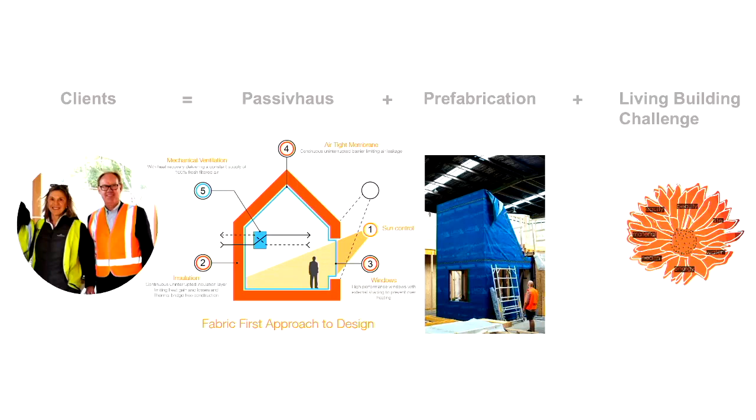Like all projects, we start with the clients, and in this case, Kate and David came to us with a really passionate brief about sustainability. In fact, David's background as an engineer meant that he came to us saying that he wanted to build a house with Passivhaus and Living Building Challenge principles, which is unusual, and to also explore the idea of prefabrication. So David's engineering background, I think, fueled that fascination with the construction process.

So the site is in Toorak, and it's actually fairly well aligned to get really nice north orientation onto the spaces, and it's on a quiet cul-de-sac. But it's not your typical off-grid site, which living building challenge required, and so to be able to achieve this self-reliability on electricity, the Passivhaus really created this very efficient thermal envelope that was produced in our factory, and also the project was collecting its own rainwater, treating all its black and grey water, which is a really tricky thing to do on a suburban site.

But in addition to those things, there was also the need for pretty significant areas of food production and to weave in some ideas about biophilic design into the site. The key concept of the house really started around the idea of creating a courtyard house, and to then open up the northern edge, kind of eroding that to bring in light and ventilation into the core of the house.

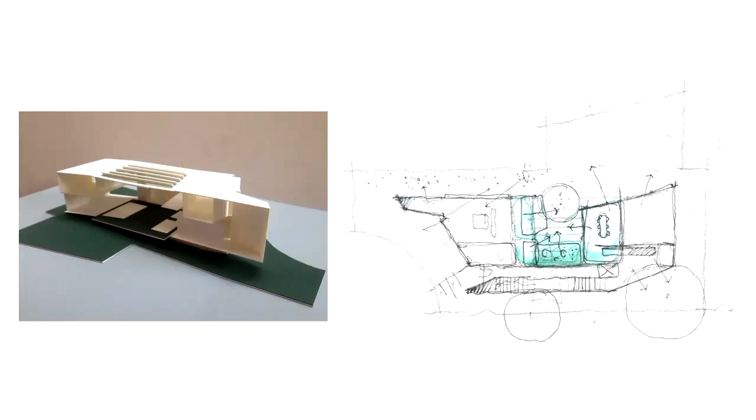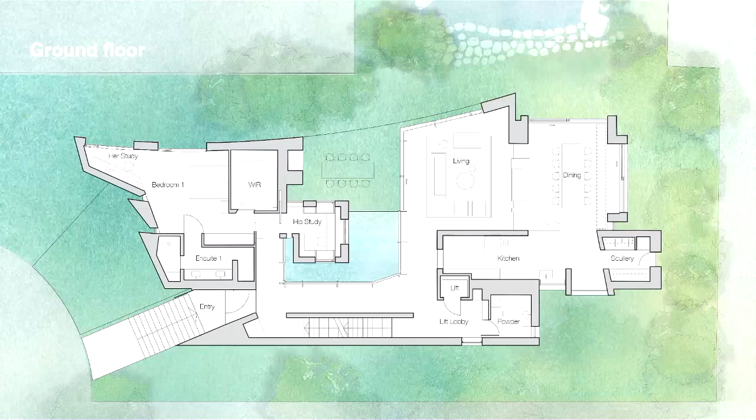The ground floor plan here, you can see that the living and dining space are set further to the back of the site, where it starts to be a little wider, just given the shape of the site, and that allows the living and dining spaces to push into the landscape further. Along the street, the bedroom is shielded from the street, which is facing west, but it does have views into a garden edge through there. And at the centre, the courtyard has a small study space floating within that, and along the southern edge is circulation and entry point.

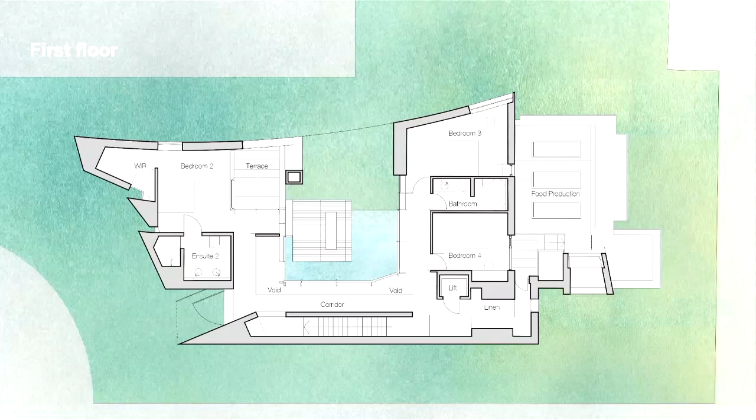At the upper level, at first floor, there's a series of bedrooms which are set around the courtyard with a layer of circulation and void around the courtyard, as well as terrace and food production spaces as well. You'll notice also that there's a slight curve along the plan to the north, which ties together the two wings of the house, if you like. At basement level, there's a garage, there's also a music studio and a cellar, and also a small plant space for the mechanical plant that's required.

One of the key decisions that we needed to make was around materials for the house, and given the Living Building Challenge, it really focuses on local materials and low embodied carbon, and that's something we would like to do anyway, but of course this is a really strict requirement of LBC. And our thoughts did turn to local stone and Mount Gambier limestone, which was used in the Heide House by McGlashan and Everist.

So we talked to the client about that, and the softness of the limestone allows it to be cut easily out of the quarry and transported to site with little energy expenditure. And also, over time, it develops a patina, which is really interesting, and they were excited by that idea. The patterning of the blockwork, the bonding and the corner detailing became a really interesting way of developing a language for the house as well.

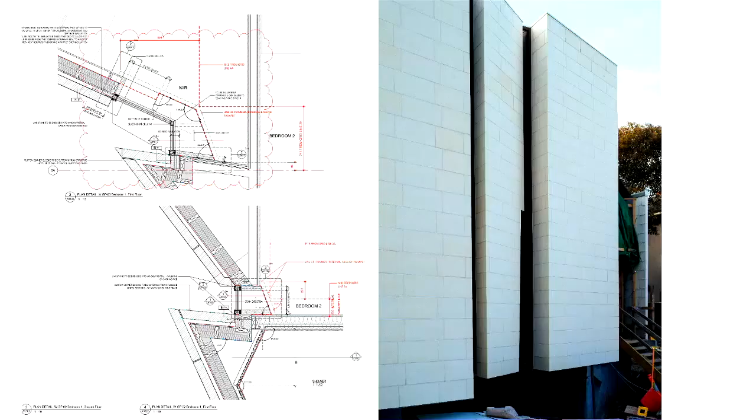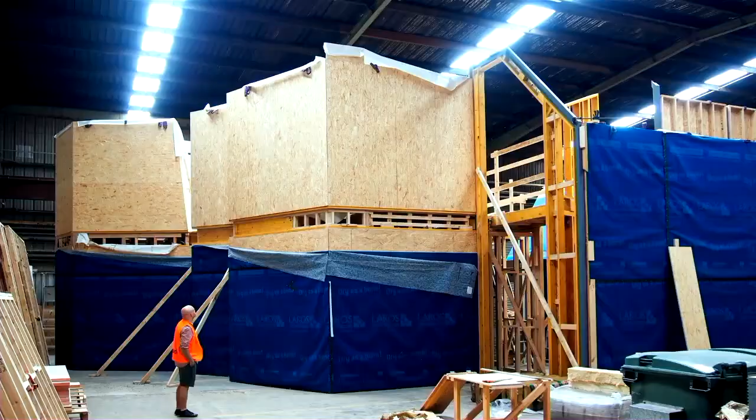Yeah, so behind this quite precisely laid out limestone layer, there's this high-performing thermal envelope, which you can see in the diagram on the left. And that was built in a factory in Sunshine at the same time as the slab and other construction aspects were happening on site, with obviously all those great benefits that prefabrication has.

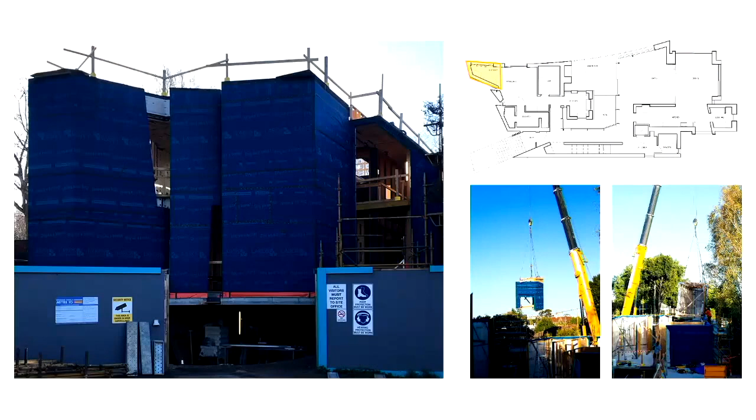And once those modules, some of them two-dimensional, where possible three-dimensional, were completed, they were systematically brought to site and placed on the recently finished concrete slab.

The appearance from the street is very much about this limestone skin, and the fact that almost in a sculpting way, the windows on the west, which is where the bedrooms are on both levels, have been sculpted away to create these incisions, which just show enough signs of inhabitation from the street at night particularly, but offer great privacy and sun control.

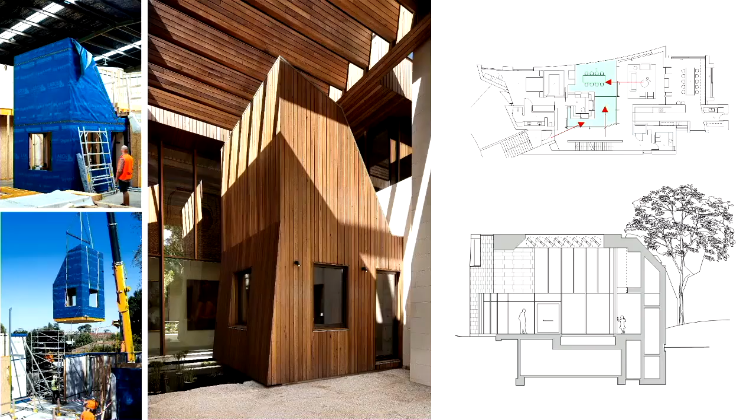And then within that courtyard space is this small footprint study, which is lined with bookshelves. It has a kind of a feeling of a library within it. It's quite tall and draws light in from above. And you can see on the left side of that slide the prefabrication of that part of the building in the factory, and then being kind of brought to site and craned into position.

Thank you. Light coming in from above into that courtyard space is moderated by some adjustable timber louvers, which are adjusted depending on the season.

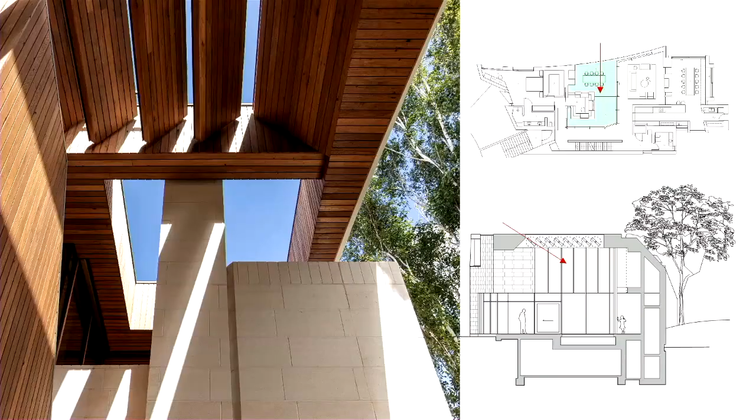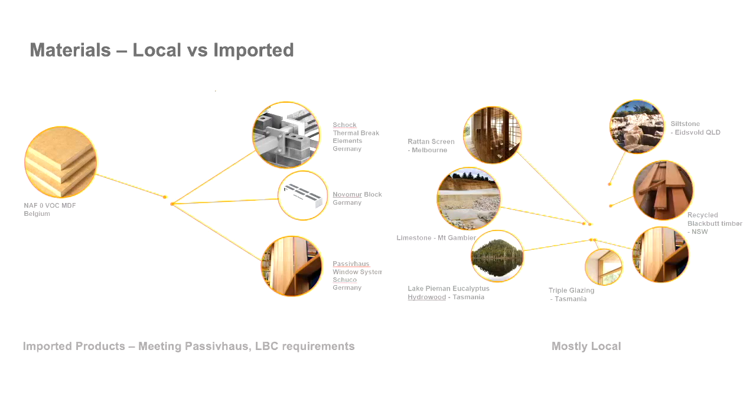And so because of Living Building Challenge, there was a very strong focus on local materials. So on the left, those materials that we simply could not get locally, like those for passive house windows or thermal breaks and the like. But generally, the materials are local, so Gambier limestone on the floor, it's a Queensland siltstone, blackbutt, as Stefan mentioned, and then internally a eucalyptus from Tasmania predominates.

So very much about two materials as you go into the house, but what's really interesting is that beyond this really calm appearance, there's a lot of technical aspects that are happening below and above the finished layers.

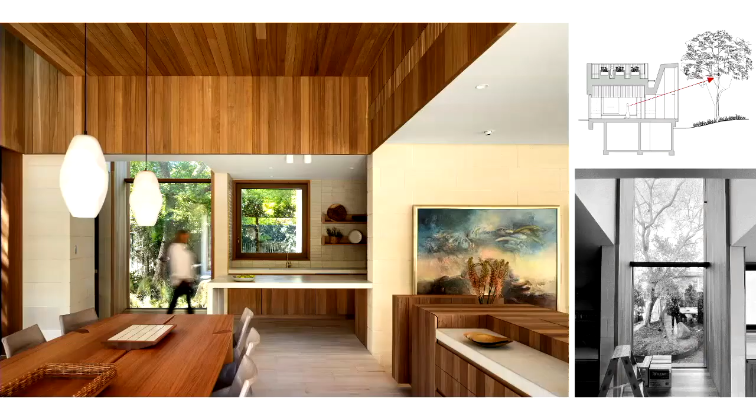Looking back the other way, the focus, which is generally on the north side, changes to this view towards these very significant Chinese elms. So there's a very oversized window that really picks up the proportions of the tree. So natural materials, generally very much about being local, being naturally sourced, and also being made by someone. So concrete and rattan screens show evidence of someone's hand.

So the house, as Diego described, is almost inscrutable from the street, but it opens up as you enter and walk inside, and the courtyard brings that dappled light into the centre of the house. The natural materials will over time, we really hope, change and develop that patina and really bed the house into the landscape of the site as well.